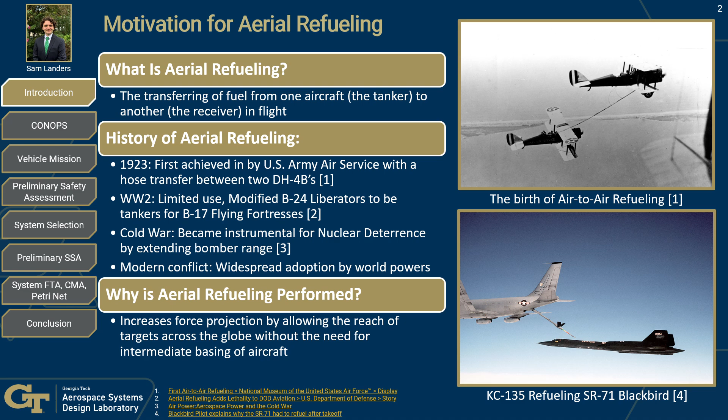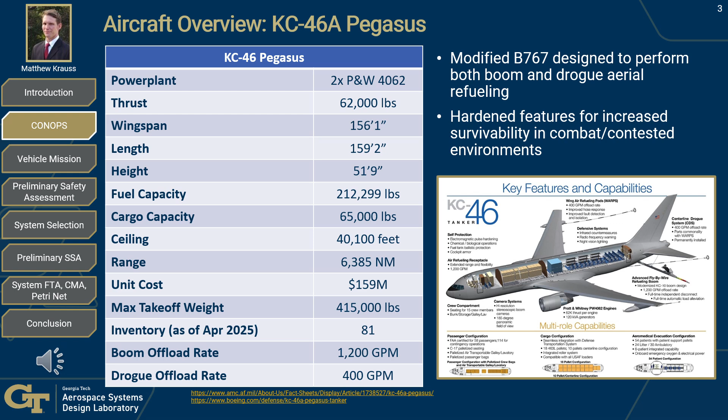In addition to the features and capabilities laid out in the previous slide, the KC-46 has many aspects that make it advantageous. It has a larger refueling envelope, centerline drogue system, nuclear, chemical, and biological hardening, flight deck armor, and also has the capability for aeromedical evacuation, among other features.

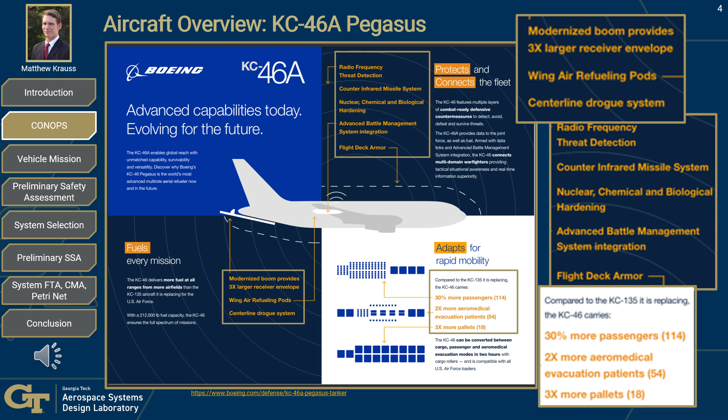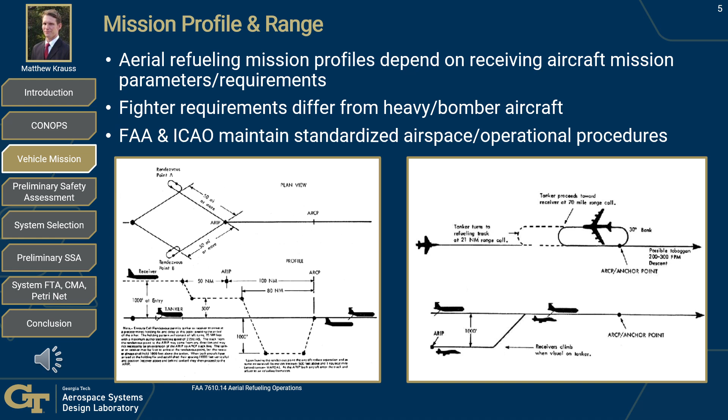Like other tankers, the KC-46 has a mission profile and range that fit under normal standardized guidance under the FAA and even ICAO.

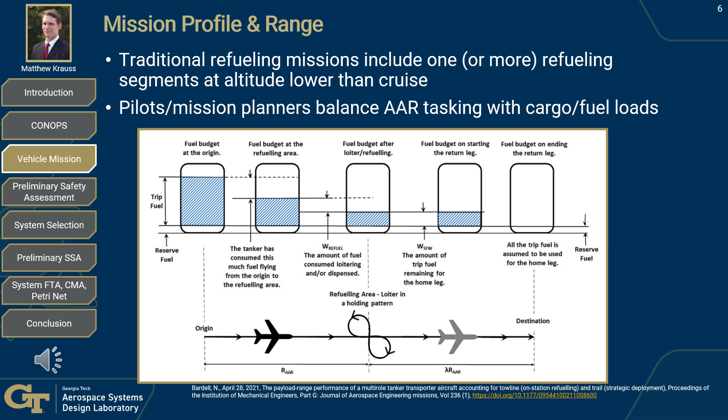Another important aspect of the mission profile is the aerial refueling itself. Not only does the KC-46 need to consider its own fuel to accomplish the mission, but also what fuel it would be able to loiter with while waiting for receivers to come receive the gas, and also how much gas it will give to other receivers. All of this makes the mission set of the KC-46 somewhat complicated.

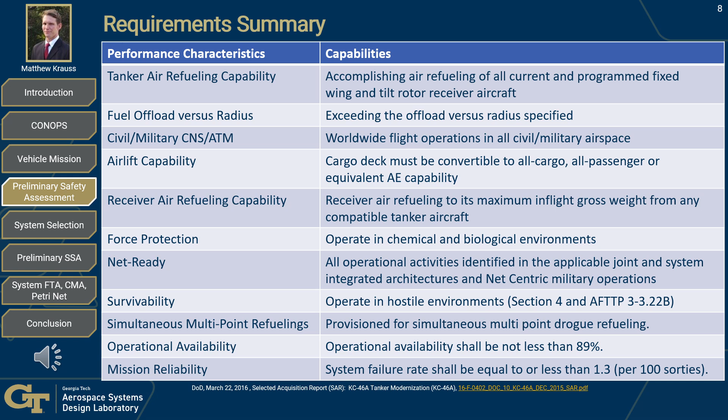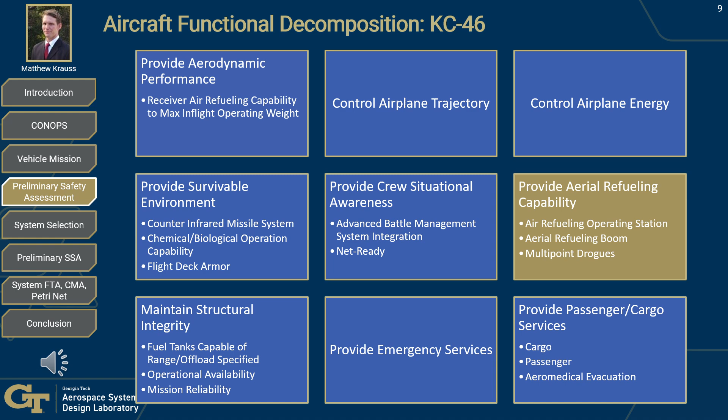With both the requirements from the previous slide as well as all of the features and capabilities from earlier, we can complete the aircraft functional decomposition of the KC-46. Please note the box that's highlighted for provide aerial refueling capability. This will be our subsystem of interest through the remainder of the presentation.

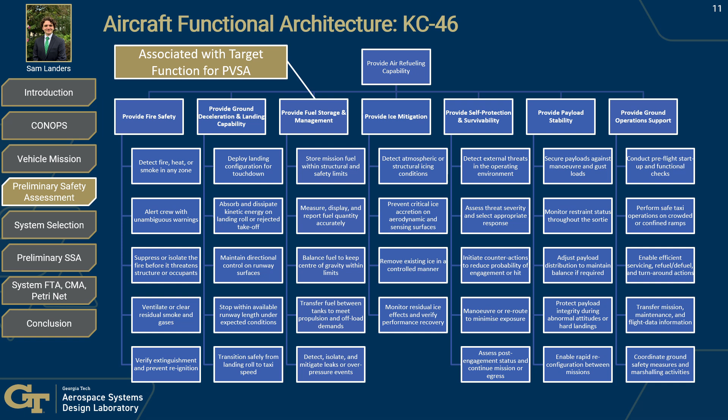Now that we have identified the major systems of a vehicle, we are allocating these logical systems to the functions. Highlighted in yellow here is going to be the subject function of our PSSA later on.

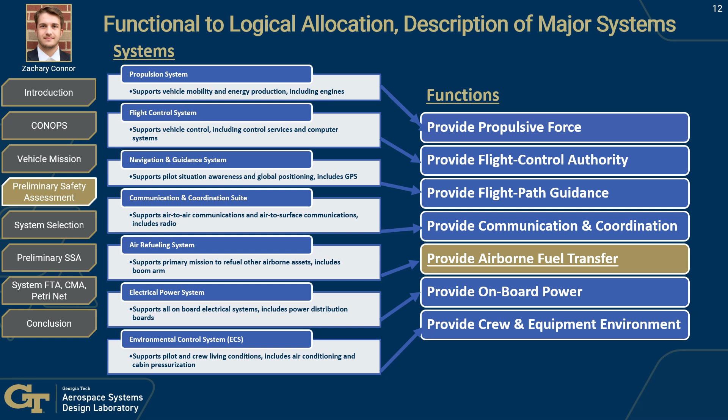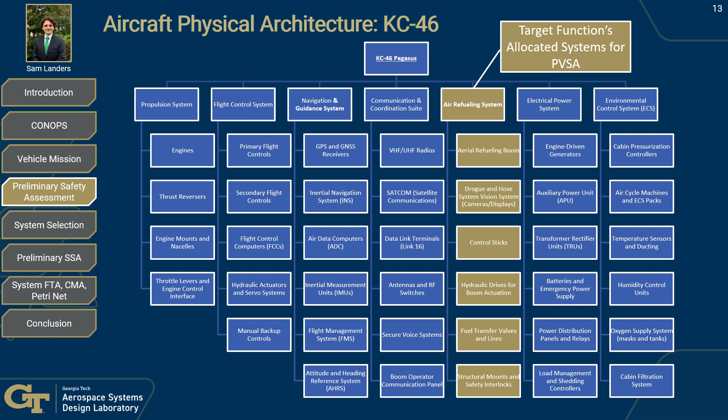We also highlight related elements from the electrical power system, such as the APU and TRUs, which power mission-critical avionics and fuel systems. Finally, components from the environmental control system, like temperature sensors and oxygen supply, ensure mission readiness and operator safety, particularly for the boom operator station.

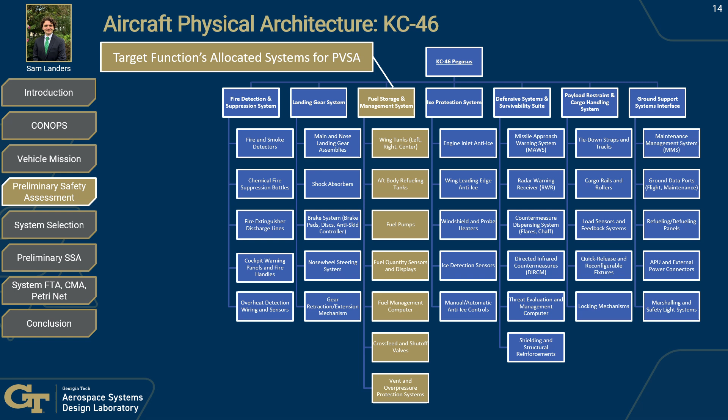These ensure that the fuel is safely stored, measured, and transferred under dynamic flight conditions. Other critical interfaces include fire detection and suppression systems, which help mitigate hazardous fuel leak scenarios, and ice protection systems, which are essential for maintaining safe operability during high-altitude refueling operations.

For instance, failure to disconnect fuel transfer is classified as catastrophic, while uncommanded fuel offload is hazardous. This assessment establishes the vehicle-level safety targets used in our downstream system analysis.

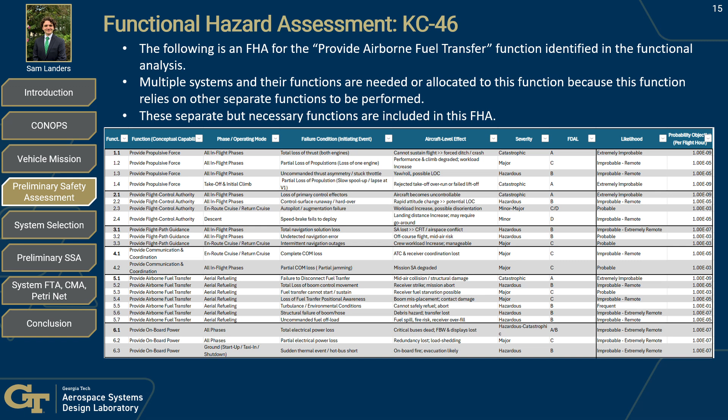Other risks include fuel tank overpressure or ice protection failure, both of which can cascade into mission failure. These failure modes provide the foundation for our later system-level safety analysis, including fault trees and independence evaluations.

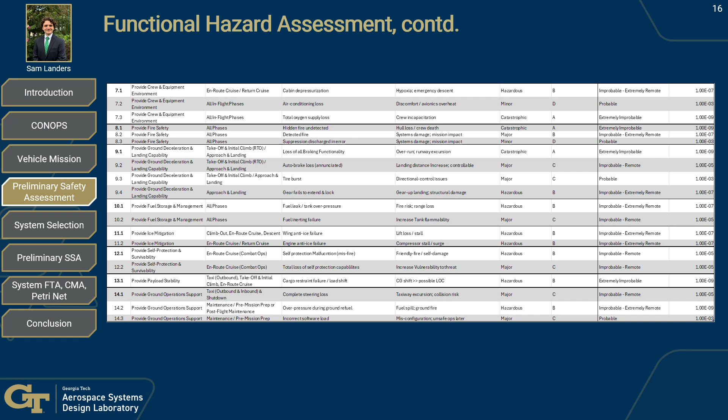As the severity of the risk and the likelihood of the event happening increases, the impact to the aircraft does as well, culminating in a catastrophic impact shown in red in the upper right-hand corner.

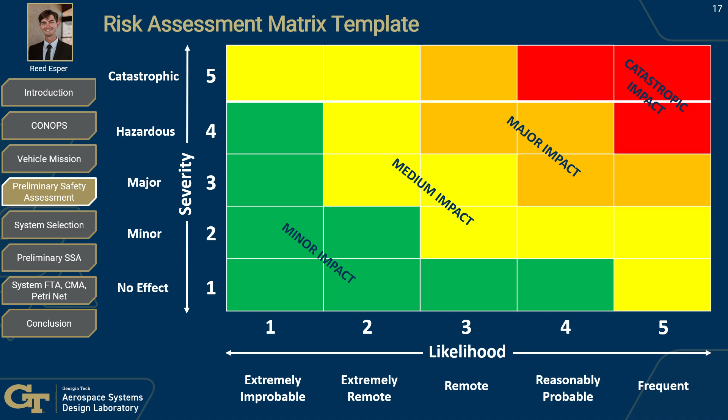The impacts of tire burst and incorrect software load are the most major impacts that the team highlighted, and are shown in the orange band. These are major and reasonably probable likelihood of happening.

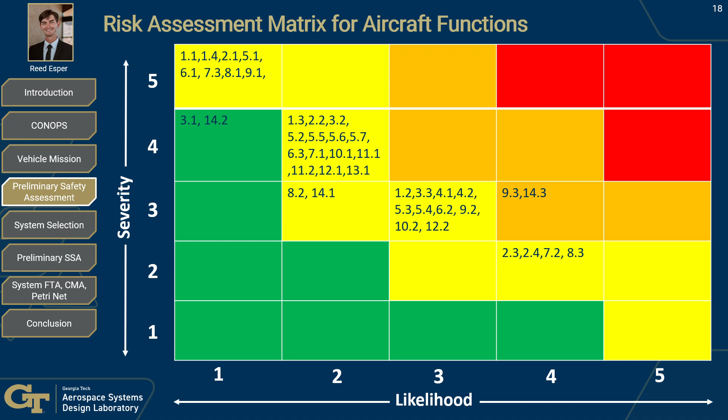The common cause analysis can be completed in two different ways. The first is the particular risk analysis. Here, in either a bottom-up or top-down approach, threats to the system are identified as coming from the environment, operations, or even its design.

They're explained in ARP 4761 Appendix L, but in the case of the KC-46, these hazards tend to be generic and affect all airplanes.

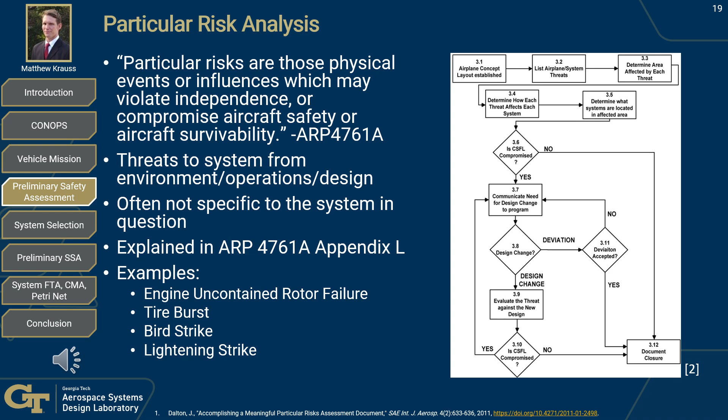Because we chose to focus on the aerial refueling system of the KC-46, a zonal safety analysis is more appropriate. Here we chose a particular system or function and drilled down into different safety hazards associated with the system.

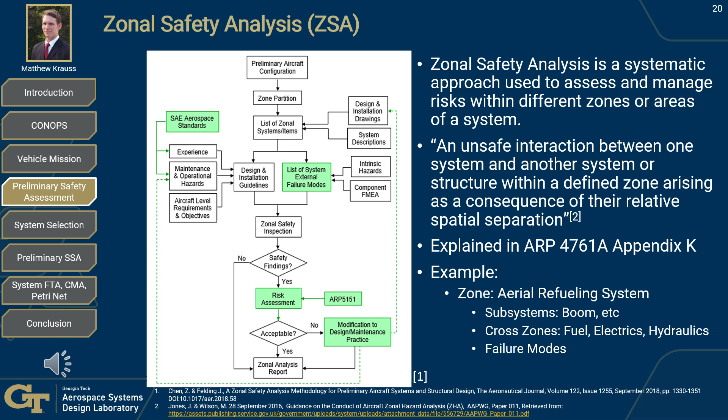In a diagram straight from ARP 4761 Alpha, we identify the air refueling components on the airplane. The subsystems include the air refueling operating station, air refueling boom, multi-point drogues, and the cross systems

include the fuel, hydraulics, electrical, and flight controls. All of these cross systems affect the operation of the air refueling system.

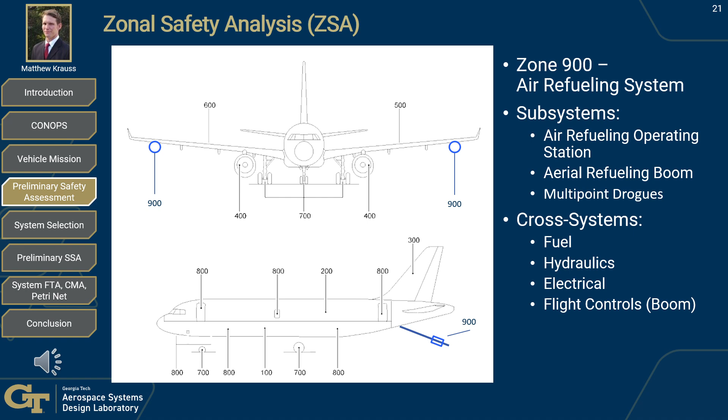Target levels of safety establish what the safety target is for the Air Force flight operations. Since this is a commercial derivative aircraft, it should meet or exceed the commercial aircraft operating in FAA airspace requirements. The TLS establishes a quantifiable acceptable risk level for the operation of the aircraft.

Our TLS dictates that there shall be no single point of failure and that the probability of the second failure is 1.0 times 10 to the negative 9th. On the right, you'll see a safety assessment process with the TLS establishment circled.

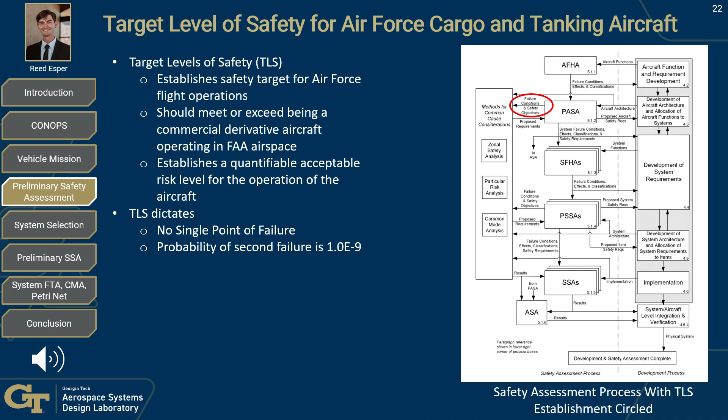This slide shows the fault tree analysis performed for FHA Hazard 1.2, partial loss of thrust. It includes safety metric values, which are very much estimates at this point in the design process. Values were input for the failure rates of each event, and the software calculates the risk at the top gate based on the tree's gate structure.

The lower level reliability can be adjusted until the risk matches the FHA probability objective, as long as it doesn't exceed that value. Ultimately, this would be an iterative process throughout the design cycle as testing and validation are performed.

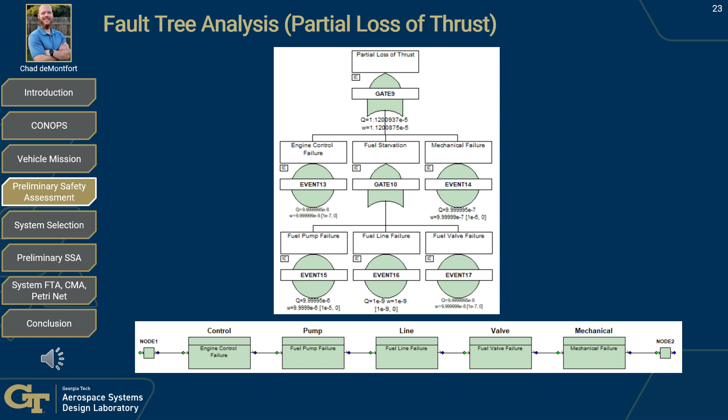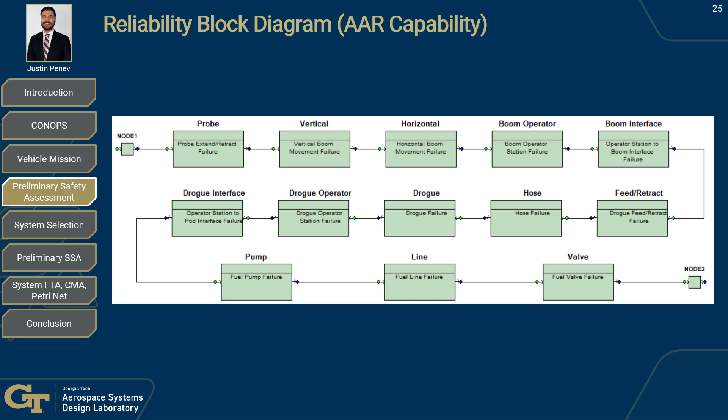This slide shows the reliability block diagram for the air-to-air refueling capability. Each block represents one of the events described on the previous slide. As stated previously, if any of the events occur, the overall chain will be broken and the air-to-air refueling capability will no longer be available.

In some mission scenarios, the KC-46 can be retasked to switch between utilizing its boom and its drogues to refuel aircraft, and this represents what happens when both of those capabilities are no longer available.

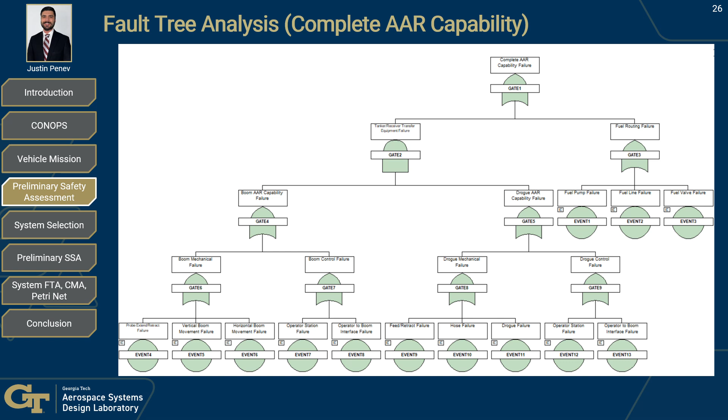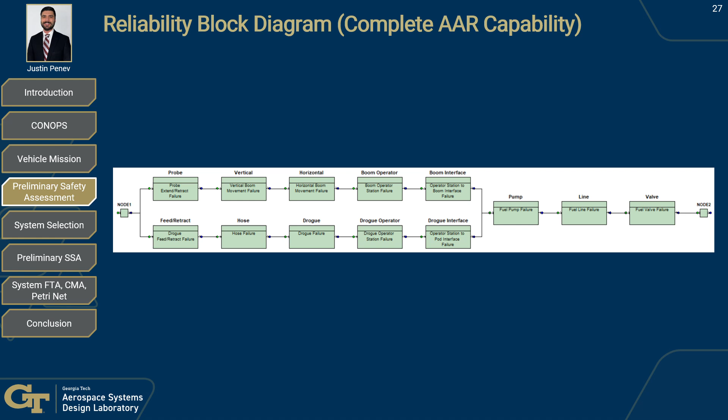For our preliminary system safety analysis, we chose the aerial refueling capability as it is unique to this aircraft. This capability interfaces with many systems on the vehicle, such as the aerial refueling system and the fuel storage system. It also performs multiple functions: provide airborne fuel transfer, and fuel management system.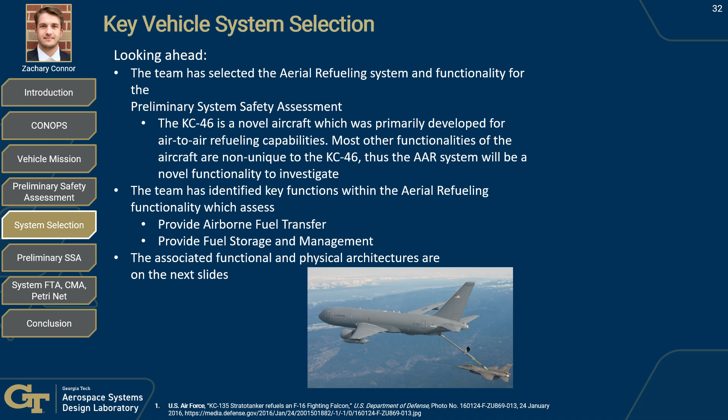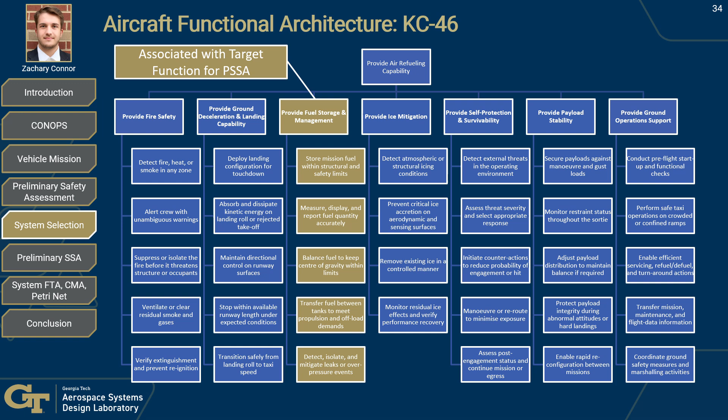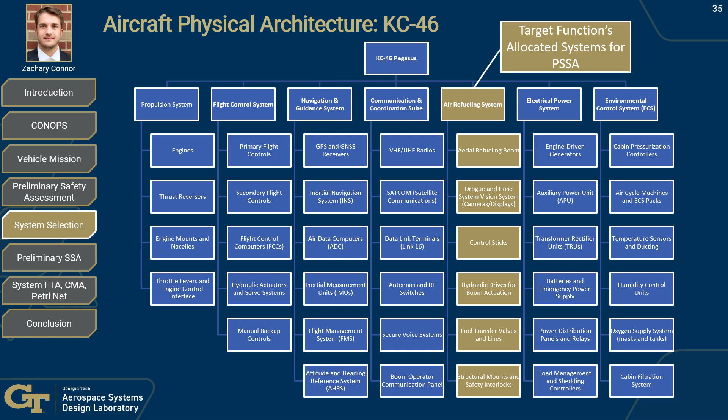Now looking into the allocations of those functions, we are specifically targeting the aerial refueling logical system here, and those directly associate with the functions identified on the last two slides. Continuing with the last physical architecture slide, we're now highlighting the fuel storage management system as well for the PSSA.

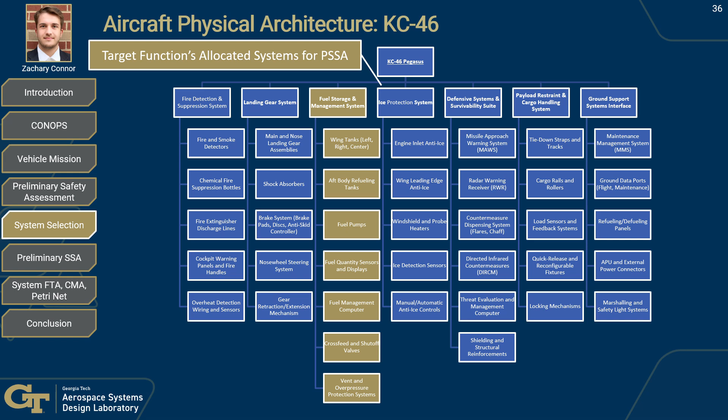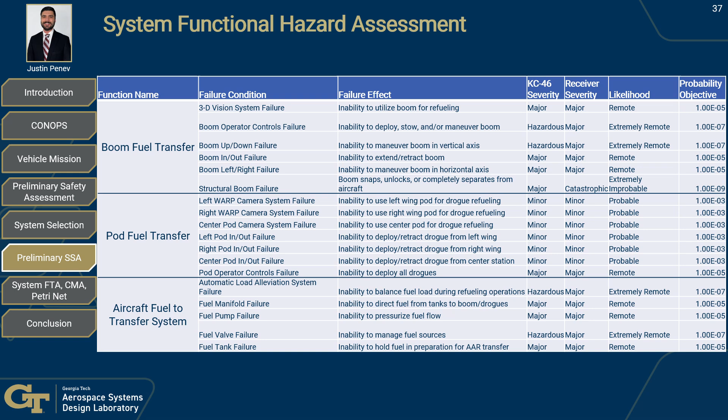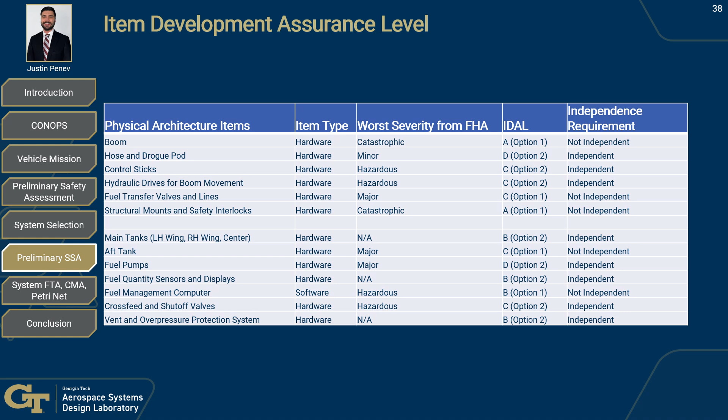The next step in the system safety analysis is to identify the item development assurance levels. We start with the physical architecture items and the item type, then bring in the worst severity from the functional hazard assessment before identifying the assurance level and defining the independence requirement. In the upper section, we see the items required to transfer fuel between the KC-46 and a receiver aircraft. In the lower section, we see the items for holding and moving fuel within the KC-46 itself.

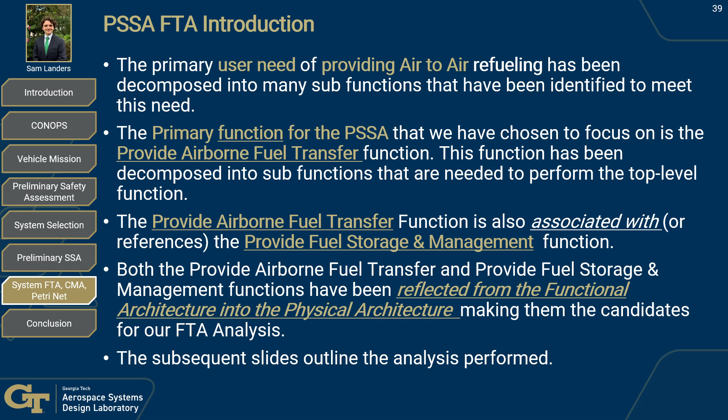Our PSSA focuses on the Provide Airborne Fuel Transfer function, which directly supports the KC-46's primary mission. This function is tightly coupled with Provide Fuel Storage and Management, so both were selected for our fault tree analysis. These functions were traced from the functional architecture into physical components, allowing us to model their failure paths systematically. The next slides show how we decompose these functions into Boolean logic branches in the FTA.

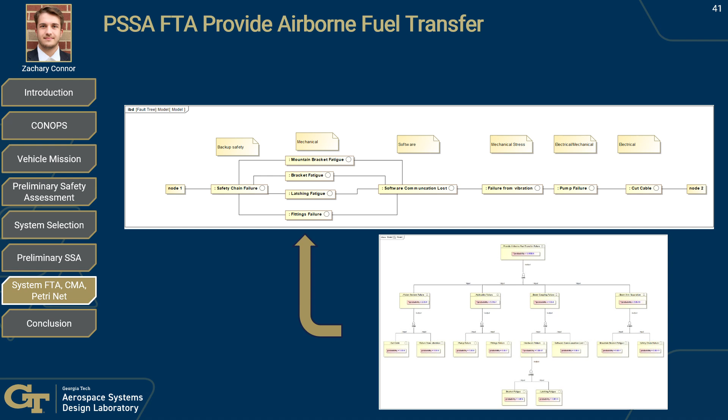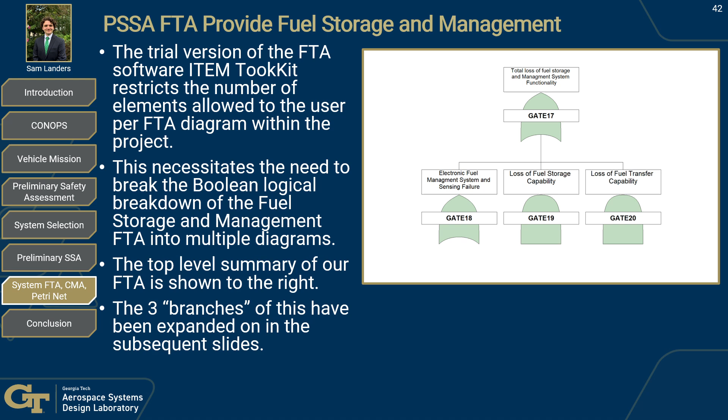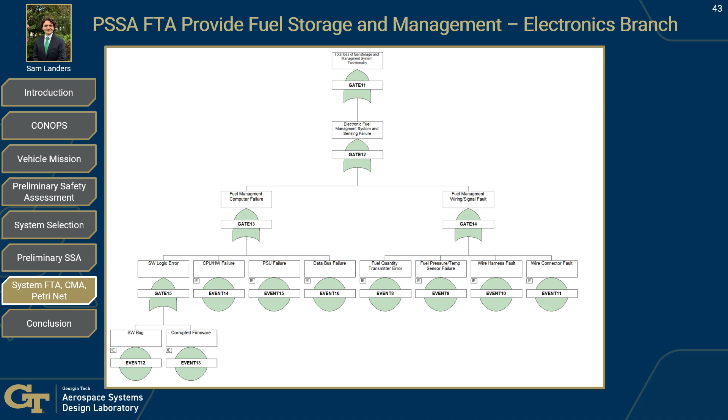This is the electronics branch of the fuel system FTA. Here we see that failure of the fuel management computer or wiring causes system loss. We break this down into specific failure modes, such as logic errors, power supply failures, sensor faults, and bus communication errors.

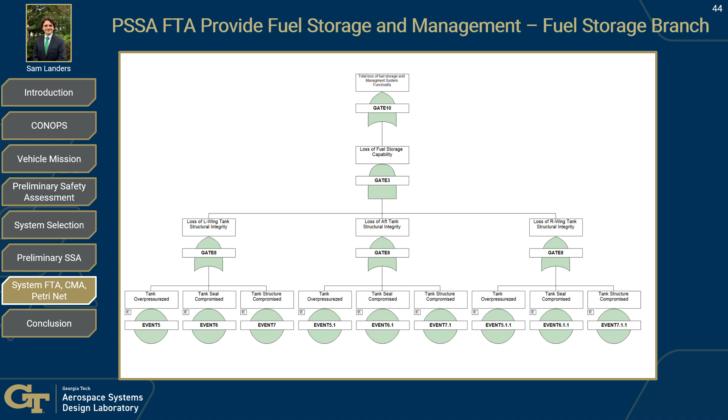Events like corrupted firmware or sensor signal dropout can cascade into systemic failure, so each was modeled to support redundancy planning. This branch essentially models the structural failure of fuel tanks, which could compromise the ability to store and safely manage onboard fuel. We assess the left, right, and aft tanks independently, with failure events including overpressure, tank seal degradation, and structural compromise. These events could arise from manufacturing defects, operational overstress, or undetected maintenance issues, and represent critical contributors to fuel system safety.

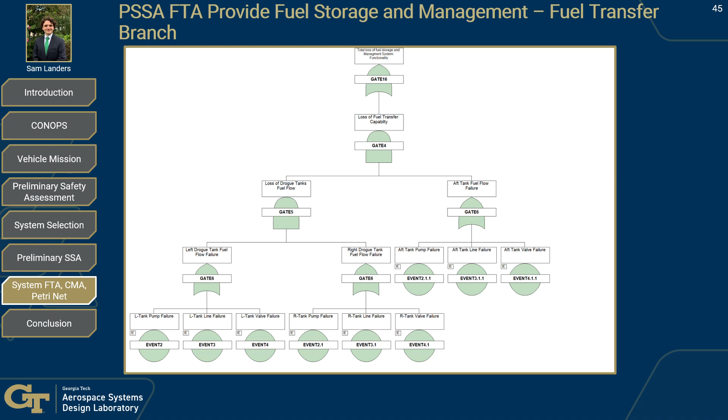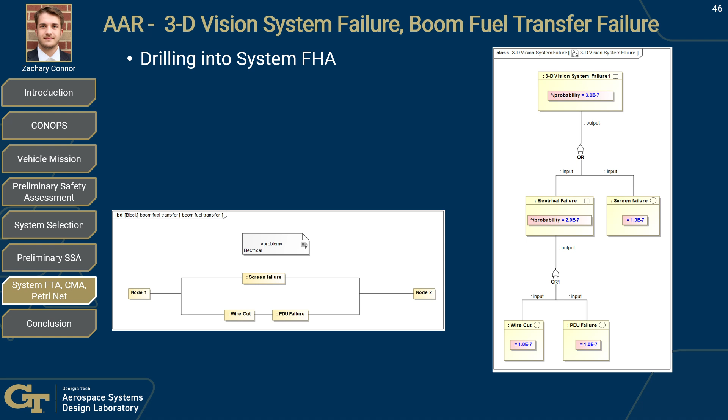Another approach for the FTA is to look at individual failure effects determined in the FHA. For example, the 3D vision system failure is separated into potential subfailures, which helps us determine lower level probabilities required for some components, such as the screen, wires, and PDU. These probabilities flow up to 3e to the negative 7, which is lower than the FHA assigned probability.

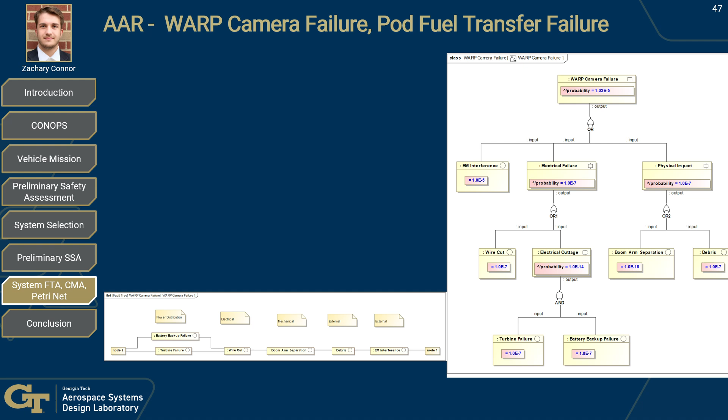Again, for the fuel pod, the WARP camera failure was identified as a failure mode from the FHA. Here we match the FHA probability of 1.02e to the negative 5 and separate out the states into lower level events. The main contributors to failure are electromagnetic interference, electrical system failures, and physical impacts.

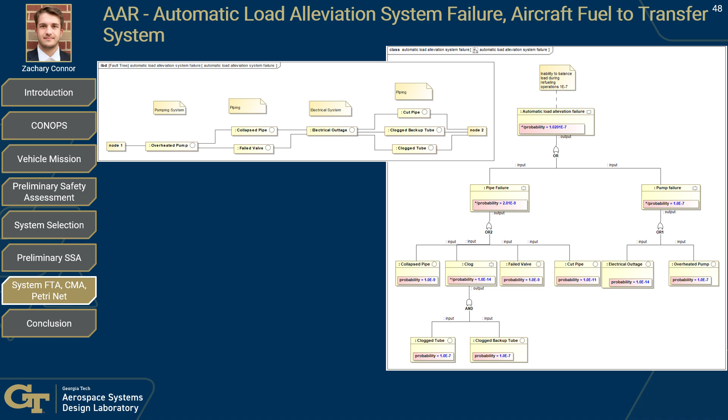Following suit, the automatic load alleviation system was investigated, with many overlapping basic events to the higher level FTAs earlier. Those repeated events, such as clogs, collapsed pipes, failed valves, and overheated pumps, are assigned probabilities to ensure the overall failure probability meets FHA requirements.

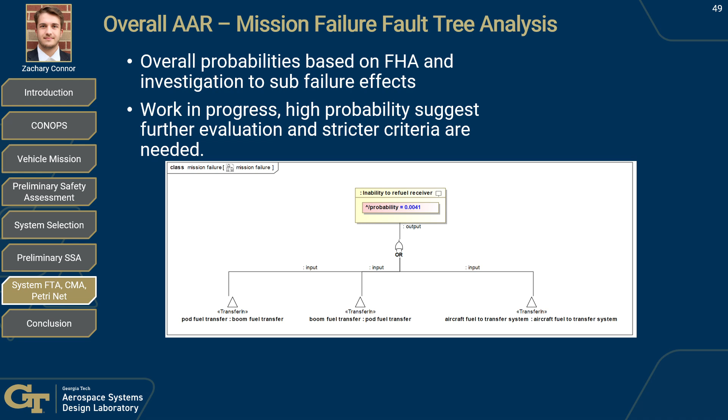Circling back to the original high-level FTA, we can now provide probabilities to the overall PSSA FHA through these subfunctions. Keep in mind that more investigation is needed, especially since the overall failure probability remains quite high. Likely this mandates stricter independence criteria and lower overall probabilities for the intermediate events.

Drilling in, we can see the logic which combines all probabilities from the failure effects. Some of these probabilities are funneled up through the previous FTAs using Cameo Systems Modeler. It should be noted that the overall logic combining failure probabilities could provide misleading failure probabilities, since there is likely significant overlap in basic events. This directly ties us into our investigation into common mode analysis.

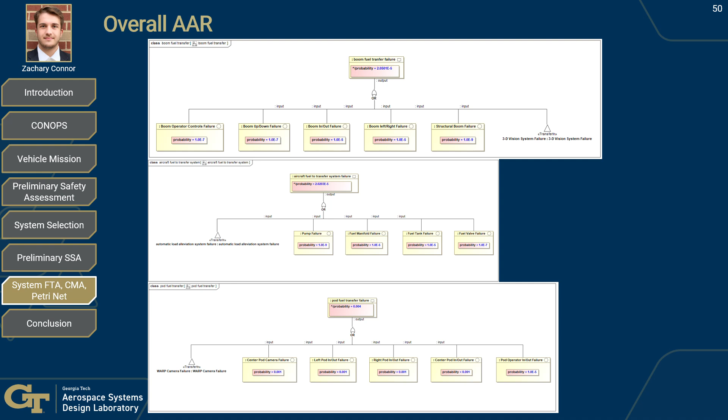The next few slides go through one of the safety analysis processes we used that's found in ARP 4761, known as the Common Mode Analysis, or CMA. In complex systems like the KC-46 tanker, where redundancy is key for safety, a CMA helps us uncover hidden vulnerabilities. It's all about identifying single events or errors that could defeat multiple independent systems simultaneously, ensuring our aircraft remains safe and reliable. The CMA can be performed at the aircraft or system level.

In this case, we are applying it to the aerial refueling system. A CMA is a systematic qualitative method that dives deep into a system's design, development, manufacturing, and operation. We're looking for common causes, factors like shared power sources, identical software code, environmental stressors, or even human error in maintenance that could lead to multiple failures at once.

The process involves tailoring detailed questionnaires, such as the ARP 4761 example found in Table M1. The questionnaire can be tailored and is used to gather extensive inputs from design and operations, identifying critical independence principles that the system relies on, and then rigorously evaluating those principles against every conceivable common cause. The process is normally iterative, and what we present here would be the first pass, with results fed back to the design to make it more robust.

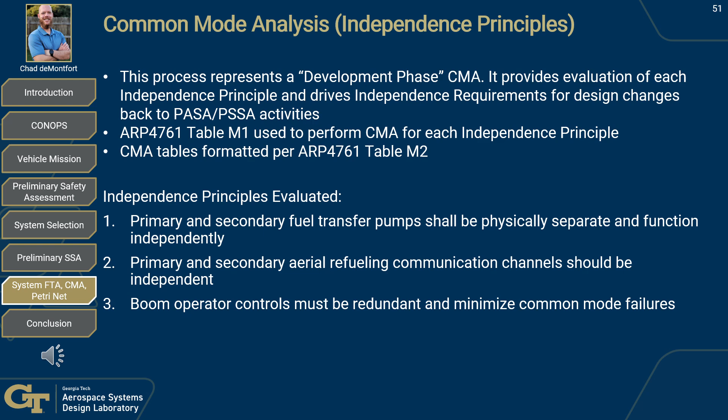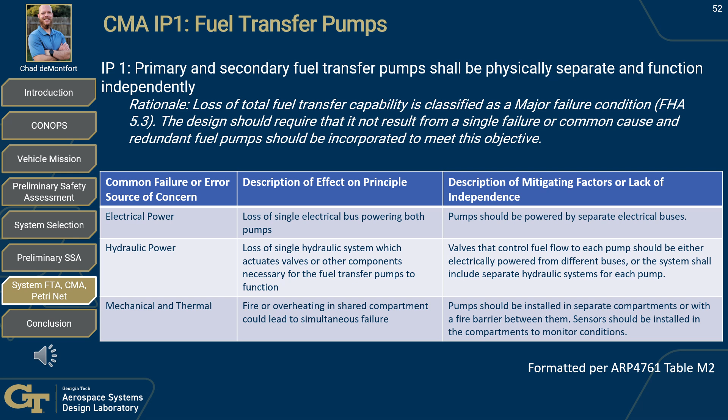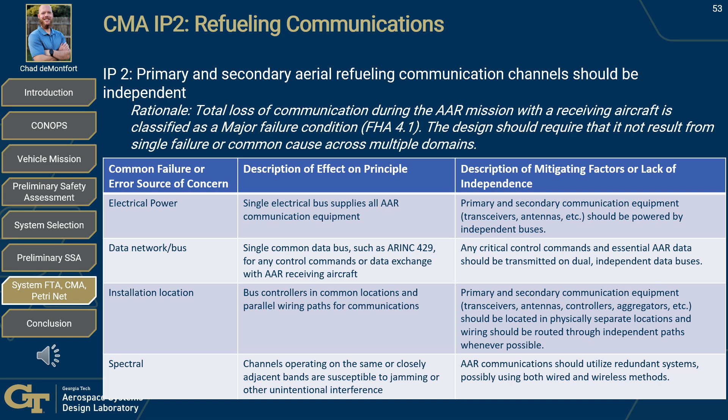It's a continuous process, ensuring that even the most subtle vulnerabilities are identified and addressed throughout the aircraft's life cycle. This process should be repeated once detailed design efforts have been performed to ensure that independence principles are still met.

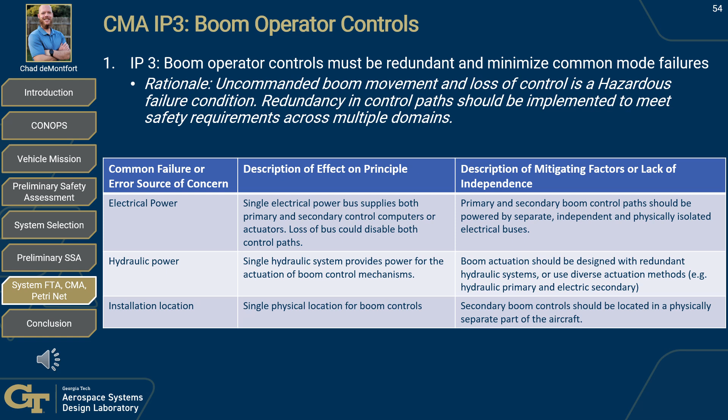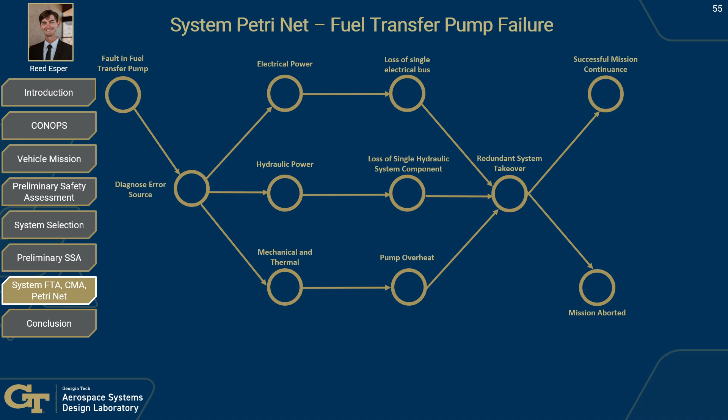The previous model details what possible failures could happen in the fuel transfer pumps and what mitigations we have identified as being present. If the mitigation is successful, the aircraft can continue the mission. However, if the mitigations fail, the mission must be aborted and the aircraft returns to base.

What is different with this system level view versus the aircraft level view is that a failure of multiple systems causing the mission to be aborted would be viewed as catastrophic for the system. But at an aircraft level, the aircraft and the crew would be able to return to base, which reduces the threat level for the specific failure when looking at the aircraft as a whole.

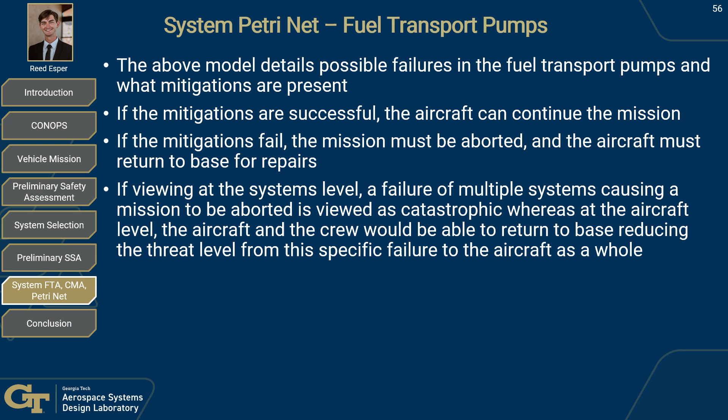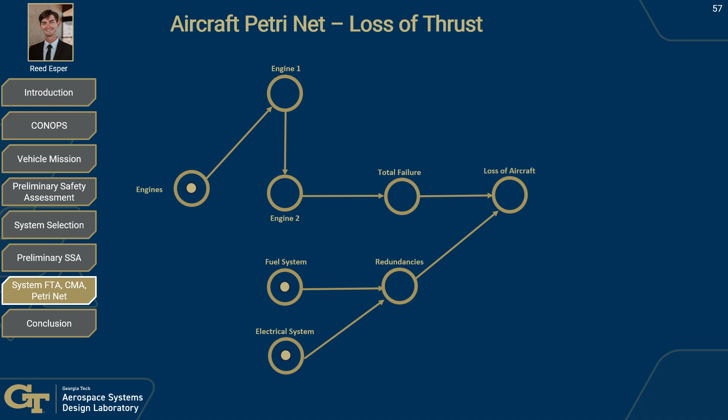For fuel systems, we will have redundancies. If all of these redundancies fail, you move to loss of aircraft. The same goes for the electrical system. If the redundancies fail, you can result in the loss of an aircraft.

For the aircraft Petri net and for the loss of thrust, the aircraft level describes that the systems involved in producing thrust and the progressions of failure that would have to occur to result in the total loss of the thrust of the aircraft. Total failure of any of these systems not only results in the failure of the mission, but also the loss of the aircraft and possibly the crew, which is where the differentiation from the aircraft level and the system level comes up.